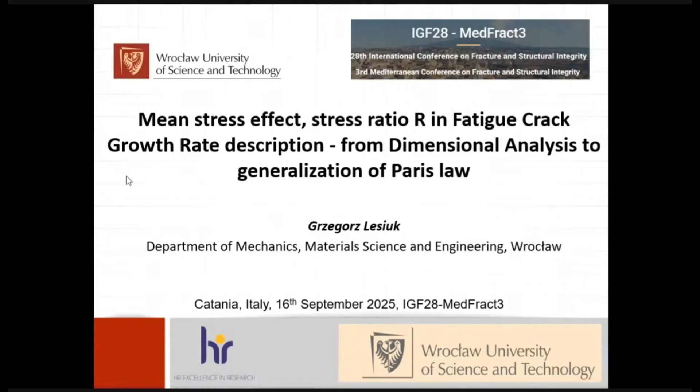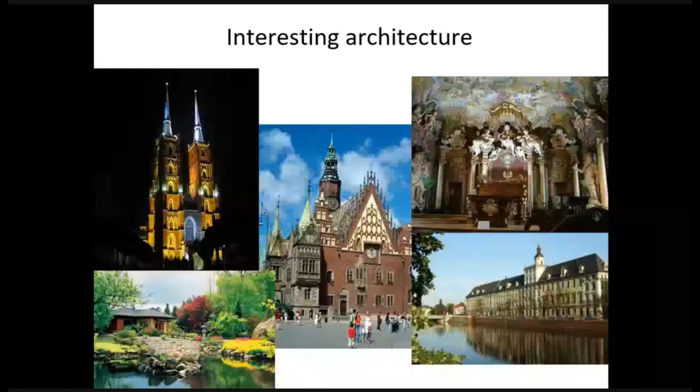This is the central point of Wrocław, the Market Square, also the Cathedral, the University of Wrocław, one of the oldest in the city. We have 20 universities and also a nice botanic garden. Okay. Few words about my university. Wrocław University of Science and Technology is one of the leading universities, with more or less 22,000 students and 5,000 staff. Half of them is, of course, the academic staff. In the doctoral school, we have more than 1,000 PhD students. It's one of the leading universities, the largest employer in Wrocław, and the second in the Lower Silesia district in Poland.

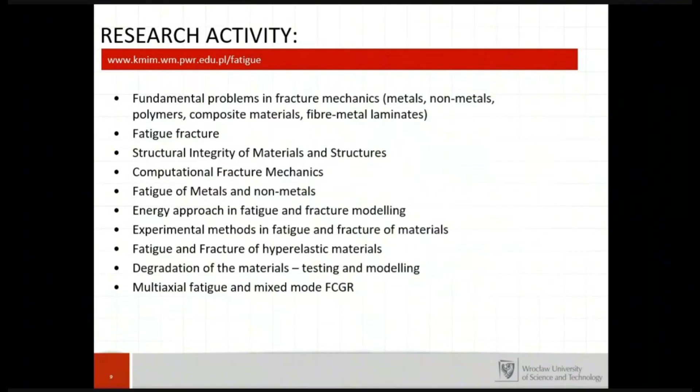Great facilities for organizing the didactic process and also scientific meetings. Let's go maybe to my department very quickly. I am the head of the Department of Fatigue and Fracture in the Department of Mechanics and Material Science. We are interested mostly in various topics associated with structural integrity, but mostly in fatigue fracture, which is the topic of today's lecture.

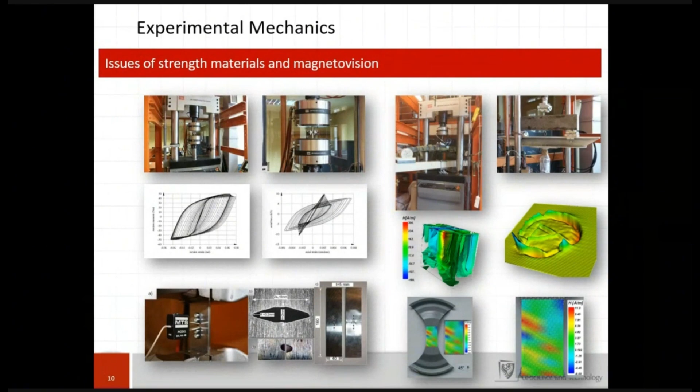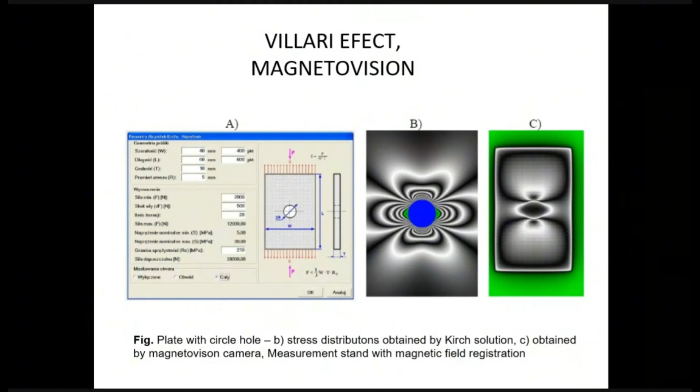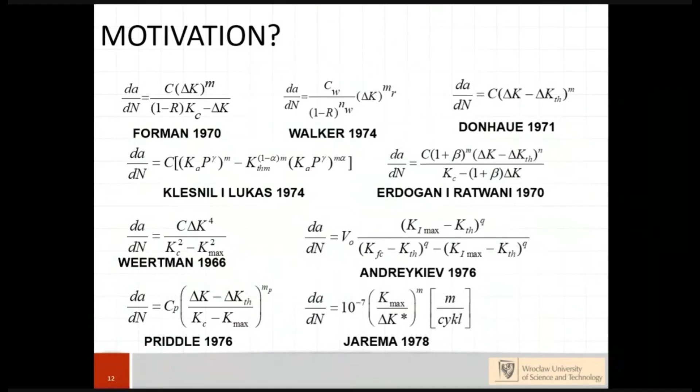However, if we look for the models, which one can we select? I can prepare, I don't know, 10 next slides with some models, but which of the models is currently, let's say, the best? This is still a competition.

I also wanted to bring one famous quote from Albert Einstein. A theory can be proved by experiment. It's of course true, but no path leads from the experiment to the birth of the theory. It seems that in our case, it's exactly inverse. We started from the experiment, and Paris introduced the Paris law by observation of the experimental behavior of the cracks. Is it true? I think yes. If we look at the literature review, recently I found a great paper which ordered a lot of different scales and, of course, types and approaches.

You can see just the next 5 generations of the models based on the strain, maybe on the energy approach, based on linear elastic fracture mechanics, geometrical, plastic accumulation, of course, maybe dislocation-based, so micro-mechanical models. Which one is the best? This is still the question. And I guess that I am not able to answer today after the lecture, but maybe we can discuss some direction.

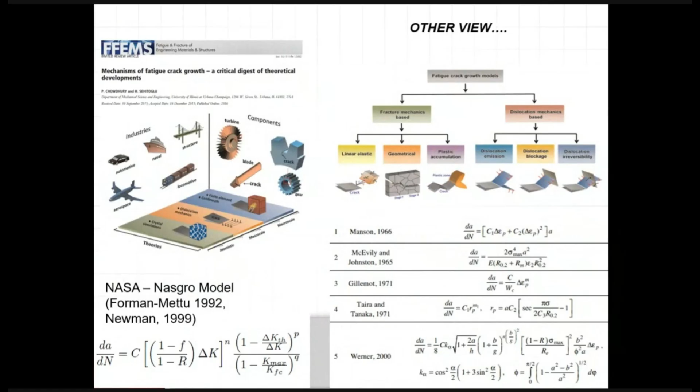Of course, if you are talking with colleagues from the aerospace industry, they love the NASGRO model. It works nice, of course. But if we consider the number of constants which you need to estimate, it makes sense only maybe for the richest companies like Airbus or Boeing, who are able to perform full-scale tests and also for different stress ratios. But still, this model is, let's say, empirical.

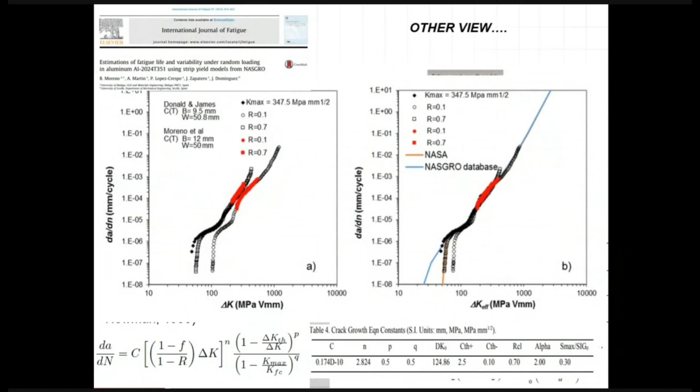Okay, let's go quickly to the main core of the presentation, dimensional analysis. Why I'm speaking about dimensional analysis, and also the way from dimensional analysis to crack growth modeling, will be clear maybe in the next few slides. But I am pretty sure that every one of you remembers it, or if it is new, I would like to present just a few important issues.

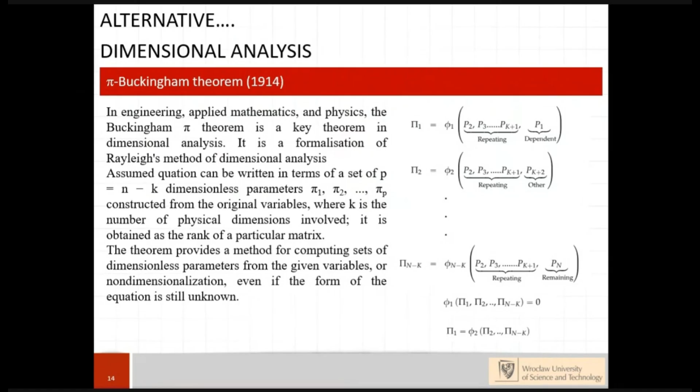Dimensional analysis is important in physics and also in modeling, especially colleagues from fluid mechanics totally benefit from the Buckingham pi theorem, which you can see dates to 1914. So Sir Buckingham explained what exactly it is. Simply, this is the fundamental theory of dimensional analysis, which means that if we have n parameters, so if we treat our experiment as a black box, and we see that we have n variables, of which k are independent variables, we are able to build n minus k dimensionless products. That's more simple.

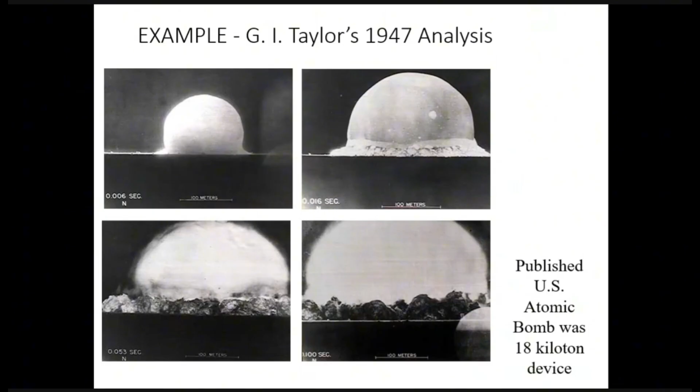How it works, in the past, maybe this is not, we love the pi, but of course, I would like to show you something, let's say, spectacular. If you remember in 1945, when there was the nuclear explosion at Trinity, people started to think, what is the dependence between the energy and, of course, the radius of the blast? Sounds like a challenge. In 1947, Taylor started to solve this problem by dimensional analysis. And of course, I would like to show you how it works on a very simple example.

So it is assumed that the radius of the blast depends on 3 parameters: energy, the density of the environment, and the time. So if we look at the process, we have 4 variables. According to the notation from the Buckingham theorem, it's 4 variables, 3 dimensions, which means that we are able to build 1 dimensionless product. Of course, we can express all quantities in the fundamental variables from physics. After selecting E, t, and rho as repeating variables, we can build that pi 1 is R times energy to the a, t to the b, and rho to the c. And after the simple solution, it is called in the theory of dimensional analysis Rayleigh's method.

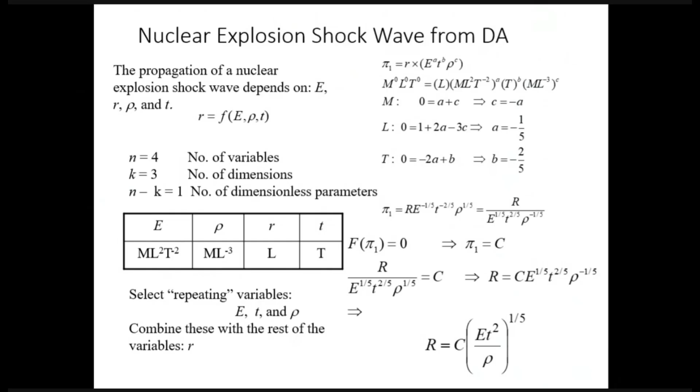It's very simple, the exponent method. We can solve a very simple equation and find the c, a, and b exponents. Therefore, we have pi 1, which is, of course, physically consistent with the dimensions. And if it should satisfy the equation of fundamental dimensional analysis, it seems that pi 1 must be a constant. So we have the simple dependence for the blast radius. And finally, if we have this, of course, we need an experiment. Therefore, by observation of the expanding blast radius from the photographs, we are able to calculate, by solving the equation, what the energy is. Of course, it is more or less true and close to the true value that was used during this trial.

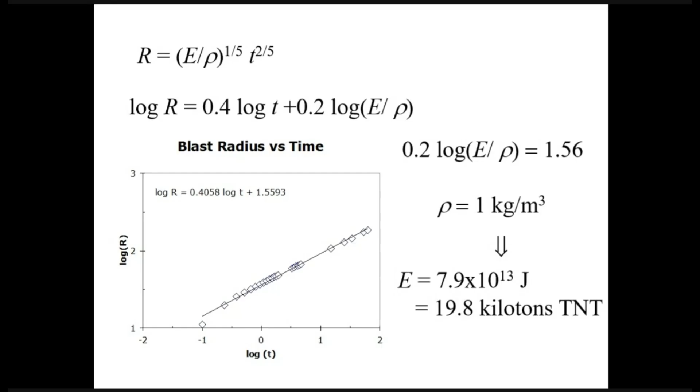Maybe it's not a nice example because it's about a nuclear bomb, but of course, in physics, especially in hydraulic systems, there are a lot of examples of successful implementation of dimensional analysis: Reynolds number, Mach number, Froude number, a lot of invariants. Why not in fracture mechanics? When I started to prepare my presentation, of course, I made a sentimental excursion to the heart of dimensional analysis. There are not many papers regarding dimensional analysis and fatigue crack growth models in the same sense, of course, as in physics.

However, if you look in Google Scholar or maybe a different database, we can easily see that there are a few important Italian scientists like Alberto Carpinteri and, of course, Ciavarella and Paggi, who did a lot of work and effort. Of course, it started earlier, because in 1980 I found the paper from Barenblatt and Botvina. Barenblatt worked at Stanford University and Botvina in Moscow. They started to, let's say, capture the fatigue crack growth rate based on this.

The idea is not as simple as the previous example, of course, because we have many variables in fatigue crack growth, but maybe this lecture can explain to us what the meaning of C and m is. Also, in the paper of Ciavarella, Paggi, and Carpinteri, they explain a lot about the dependence between m and C, and whether they are independent or not. I don't want to speak about it, but just show you the way.

So they built 7 dimensionless products, and of course, you can see the Paris law looks like this. But in dimensional analysis theory, we are speaking about self-similarity, whether it is complete or incomplete. It is a crucial point if we satisfy both equations, so the limits of the dimensionless products. If we, for instance, would like to treat any variable as maybe non-essential, we need to find the limit where, for instance, pi 1 tends to 0 or infinity, so for small or very large numbers, this limit should be non-zero.

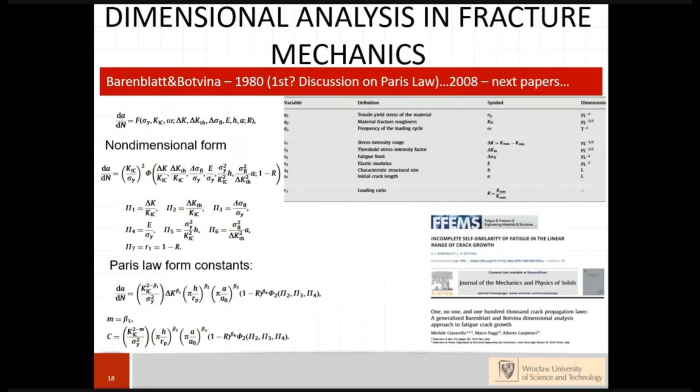You can see, for instance, pi 1, which is delta K referred to K1C, which explains the dimensionless system very nicely. You can see that for values approaching 0 it is infinite, and on the other hand, we have the second asymptotic. So we are saying that delta K is essential for the description of the fatigue crack growth rate. Therefore, you can see it comes from this to this region, then we can have delta K in the exponent m. Only in these terms can we explain that if delta K is close to 0 or infinity, the equation tends to 0 or infinity. Okay, maybe let's accelerate a little bit.

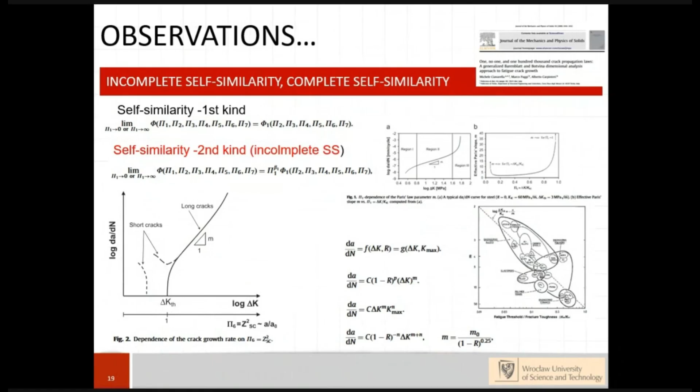So this is a great job done by colleagues from Italy. Of course, they used the fundamental theorem of dimensional analysis, and independently they demonstrated that this approach efficiently allows us to build different types of models. Of course, we know this group of models from the literature. You can find some proposals by Ricci, by Klesnil, Lucas, but also various other scientists from the Czech Republic and Poland. But the key question is, if we make one step more, what will be the next generation?

Initially, I started my adventure with fracture mechanics, of course, with the energy approach. And I had a lot of confusion at the beginning, because if we try to involve the energy approach, you can see, for instance, the old papers of Fine and Davidson, who measured the energy ahead of the crack tip, or other papers by different researchers, like Klingbeil, and also different models with the energy. We can also obtain the correlation between the dissipated energy versus number of cycles, so let's say the crack growth rate. And also in recent papers, we are now living in a new domain.

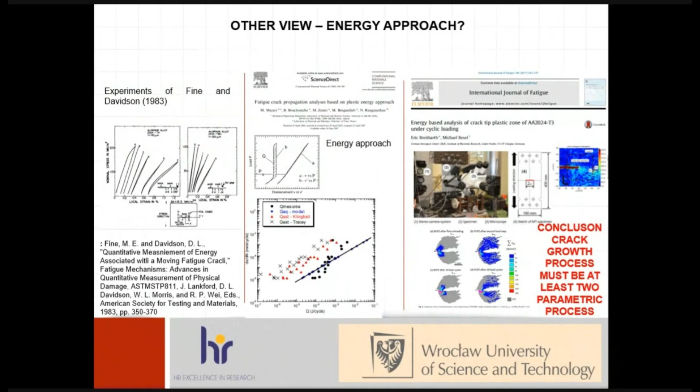I don't want to say anything about AI, but of course it could also be useful in this regime. But if we split the numerical and experimental full-field analysis in front of the crack tip, the conclusion from all works was more or less similar to that from dimensional analysis: the crack growth process must depend on two parameters. And also in our labs, we started many years ago, initiated by my mentor, Professor Chrzanowski, the energy balance for the infinite plate.

Just quickly, on the left side, based on the first principle of thermodynamics, we have the external work, heat, and also strain energy density, kinetic energy, and also damage energy. Simple balance from the physics.

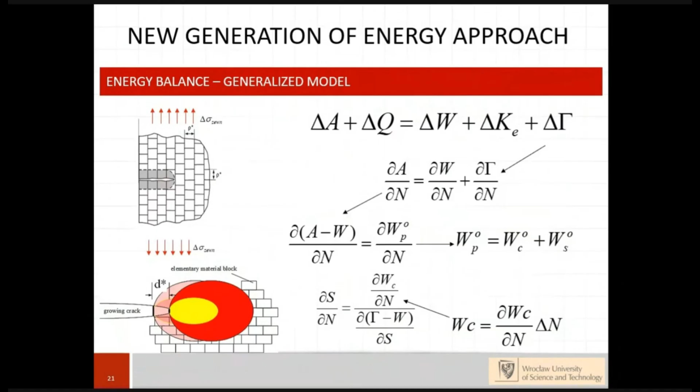Sounds very easy, but if we skip the heat energy, treating the crack growth as an adiabatic process, and also kinetic energy for, let's say, relatively low frequencies of the loading, we are able to build the energy balance. After differentiating over the number of cycles, we can more or less build the idea of the generalized crack growth, in this case, surface of the crack growth.

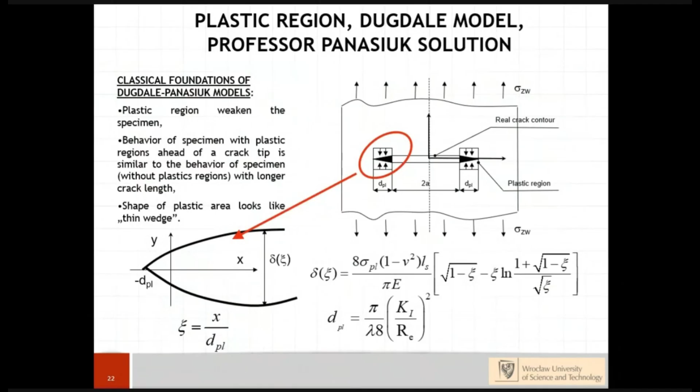Also, for this purpose, we are able to use detailed investigations from classical fracture mechanics, strip-yield models, or maybe different. In this case, it was Dugdale-Panasiuk models, and of course, all displacement in the vicinity of the crack tip allows us to calculate some components. After simplification, we can share with you our papers. And finally, it is something like this.

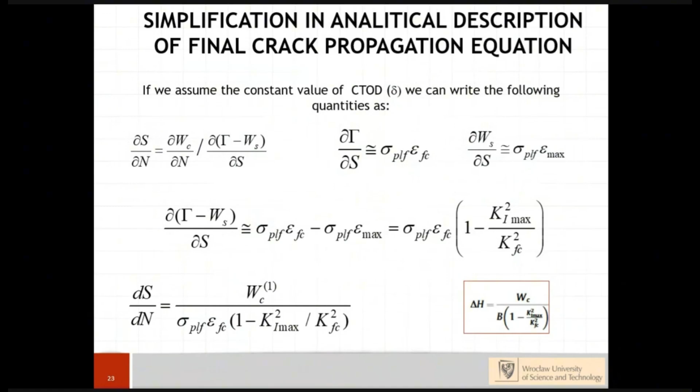So we can introduce a new energy parameter, which is based on the dissipated energy in each cycle of loading. And of course, B is the thickness of the specimen, as well as K1 max. So it is, let's say, trace of the loading, and of course, critical stress intensity factor. Moreover, this phenomenological way can also be solved in a different way.

In our case, many years ago, after Szata, and last time also in the paper with Professor Berto, we tested old steels. We would also like to remind in this paper an excellent way, which was done a few years ago, for finding the same crack driving force from the dimensional analysis. However, in this case, it was not easy to use only simple Buckingham Pi theory, so we used a novel theory, which comes from the geometric methods of dimensional analysis. And maybe just to move to the next slide, the same results can be confirmed.

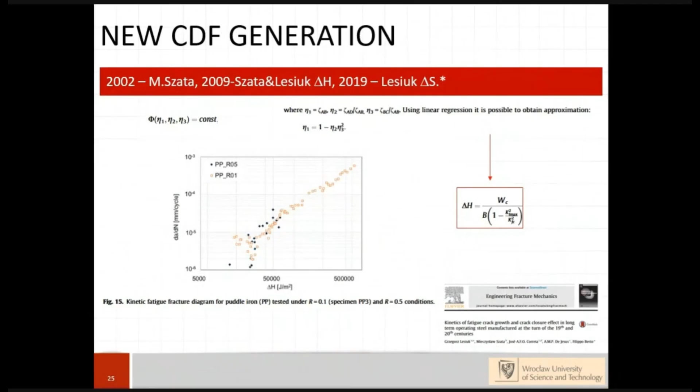As you can see, based on the energy approach, we have one line for two stress ratios, which is obviously the main beneficial effect. And also, what is important, the energy parameter overcomes all, let's say, disadvantages of the linear elastic fracture mechanics limitation.

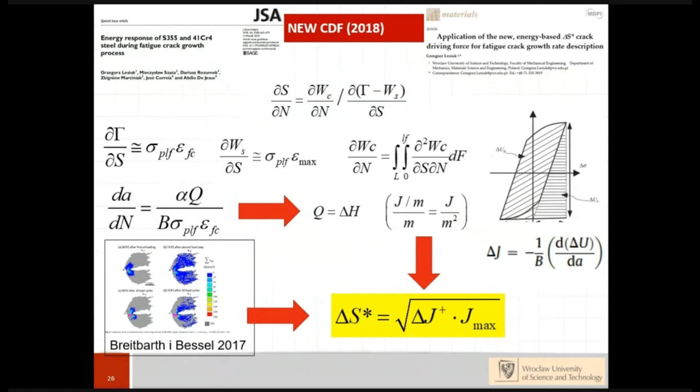Finally, I would like to show you maybe the last, but not least, parameter, which we tried to solve also by combining and maybe translating the idea of the new generation of models from dimensional analysis to delta S star, which is a combination of, of course, the well-known cyclic J integrals. And it works like this. So we have the delta J plus and J max.

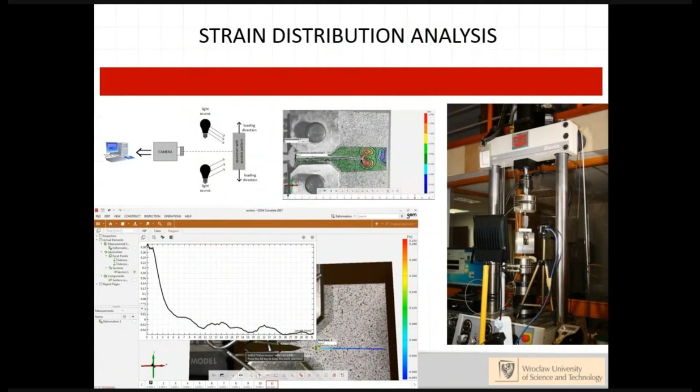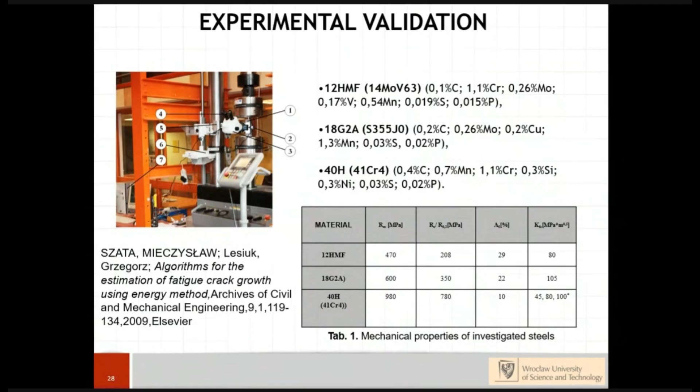And we tested, in our labs, a few types of materials. In this case, it was three types of materials. So I'm controlling the time. It was steel from the energy sector, 12HMF, also S355, and 41Cr4 steel with different hardness levels. I'm approaching the results, measuring the energy, and of course, just a very quick view of the results.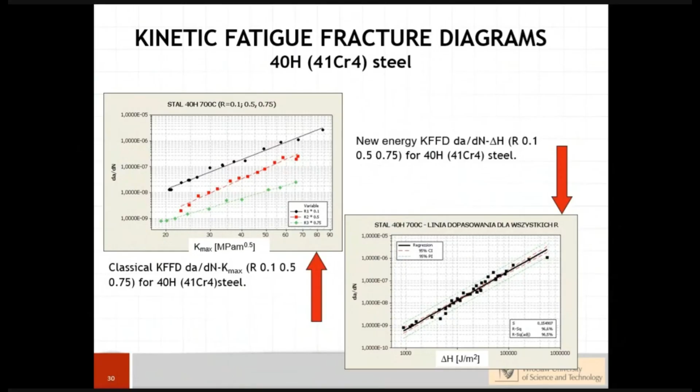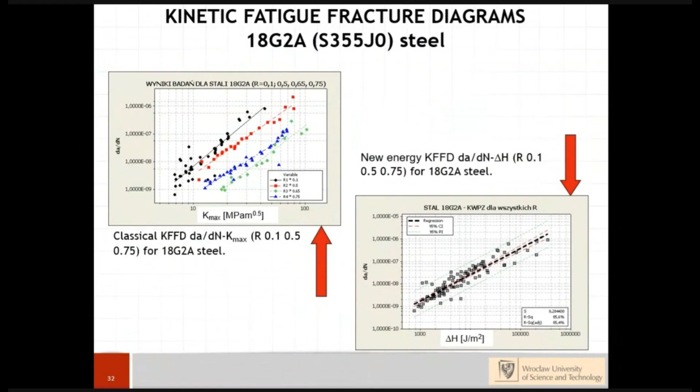We can see that for this case, for two stress ratios, we have two lines, and if we use the energy parameter, we have one line. Of course, the same for chromium steel, 41Cr4 steel, three different stress ratios, and one line for all stress ratios. The same again for different quenched and tempered conditions of this steel, for S355, four stress ratios, and one line. So I will go quickly to the final conclusion for mode 1 tests, also for different stress ratios.

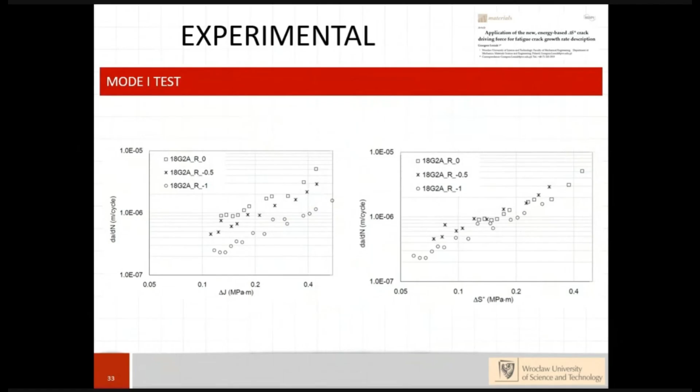However, if we plot in delta J, so let's say the cyclic J integral, it does not result in a decrease of the effect of stress ratio. However, if we use the energy parameter, it's okay. Just very quickly to conclusions.

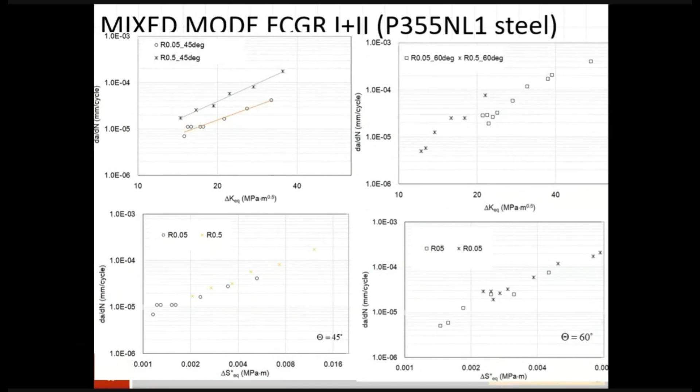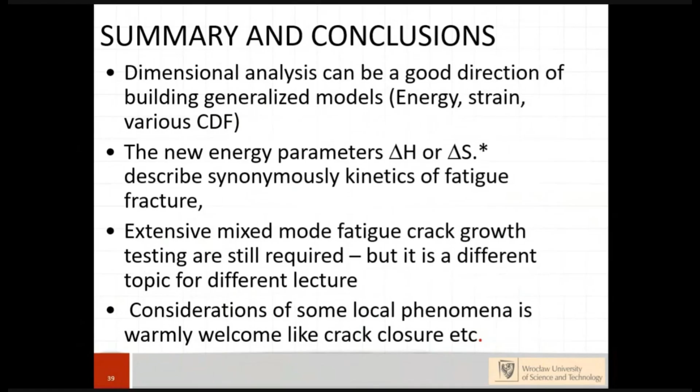Conclusions, just to finish. The main conclusion is that dimensional analysis cannot replace the experimentalist and, of course, our knowledge from fracture mechanics, but it is a good direction for finding new types of models. Thank you for your attention.